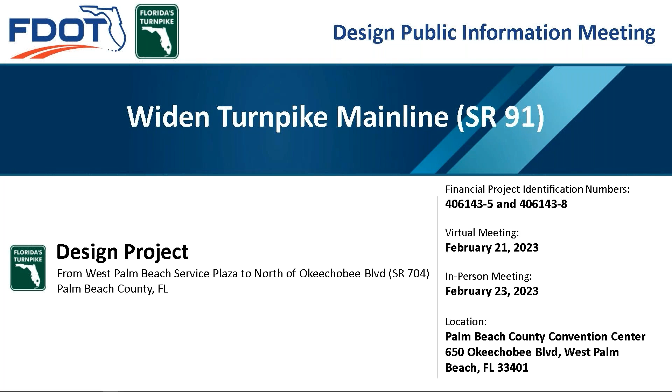This project is being developed in accordance with the Civil Rights Act of 1964. Under Title VI of the Civil Rights Act, public participation is solicited without regard to race, color, national origin, age, sex, religion, disability, or family status.

If you have any questions or concerns, please contact Susan Siddiqui at 407-264-3640 or Stefan Kulikowski at 850-414-4742. The projects are located in Palm Beach County, Florida, along Florida's Turnpike Mainline or State Road 91.

The original project has been broken up into two separate projects with different construction time periods. The first, or Southern project, begins at West Palm Beach Service Plaza and continues to north of Belvedere Road. The second, or Northern project, begins north of Belvedere Road and continues to just north of Okeechobee Boulevard, or State Road 704.

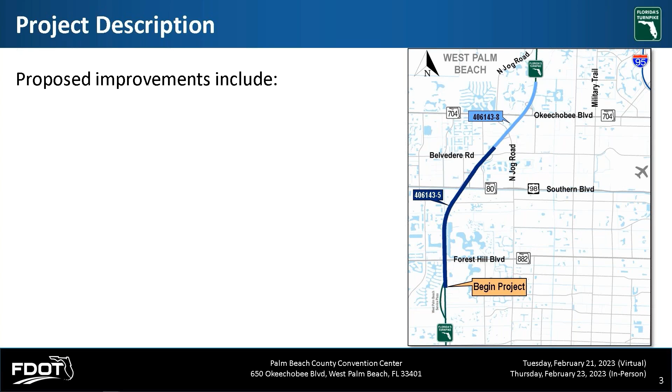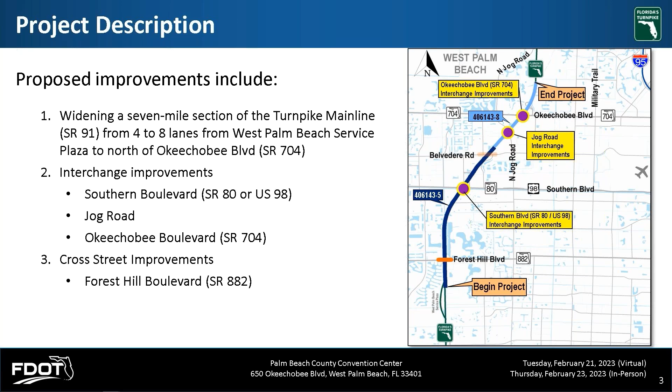Both projects will consist of widening the main line from 4 lanes to 8, and there will be improvements to 3 existing interchanges along the project corridor, including Southern Boulevard, Jog Road, and Okeechobee Boulevard. Additionally, there will be improvements to 2 cross streets, Forest Hill Boulevard, or State Road 882, and Belvedere Road.

This project is following the design project development process. This process includes 5 phases beginning with planning, project development and environment, or a PD&E study, final design, right-of-way acquisition, and finally construction. The planning phase has been completed, as well as the PD&E study.

Our project team is currently working to complete the 3rd phase, final design. During this phase, our project team will be working to implement the original project development and environment study and obtain the necessary environmental permits. The design phase is typically followed by right-of-way acquisition. However, this project requires no additional right-of-way. Construction is anticipated to begin in the 2nd quarter of 2024 for the Southern project from West Palm Beach Service Plaza to Southern Boulevard.

Construction on the Northern project from Southern Boulevard to Okeechobee Boulevard is expected to begin in the 1st quarter of 2025. The proposed design is focused on enhancing safety and operations and accommodating future traffic growth due to increasing population and freight. Today we will present the following: existing mainline configurations, proposed improvements, noise wall policy, and project schedule.

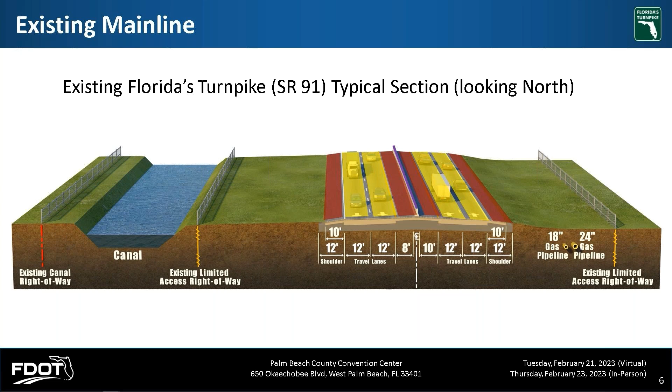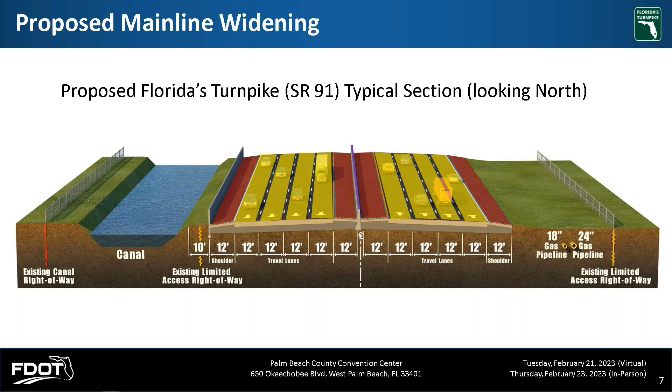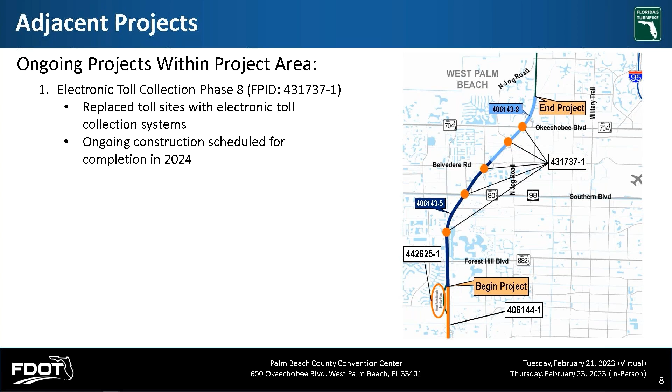The second is the Turnpike Mainline, or State Road 91, widening from Boynton Beach Boulevard to Lake Worth Road, FPID 406144-1. This project is located just south of our project limits, with ongoing construction scheduled for completion in 2025.

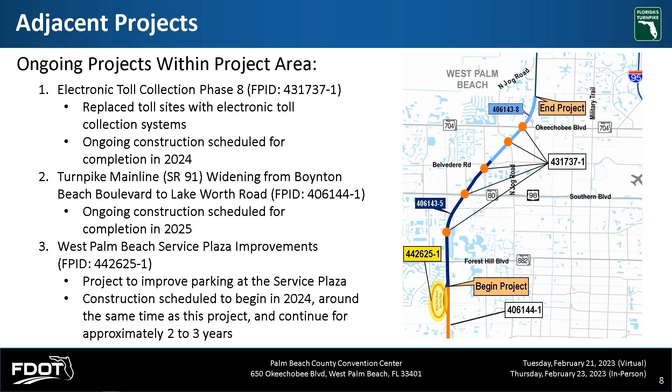The final project is the West Palm Beach Service Plaza Improvements Project, FPID 442625-1. This project will improve parking at the Service Plaza. Construction is scheduled to begin in 2024 and continue for approximately 2 to 3 years.

Starting from the south and working north, the first widening project begins here with the 8-lane widening of the northbound and southbound travel lanes starting just north of the West Palm Beach Service Plaza. The widening will continue north under Forest Hill Boulevard, State Road 882.

The Forest Hill Boulevard Bridge over the Turnpike will be replaced, keeping the current 6 travel lanes with an additional 12-foot shared use path on both sides. The existing mainline toll site will remain in operation while being widened to accommodate the new lanes.

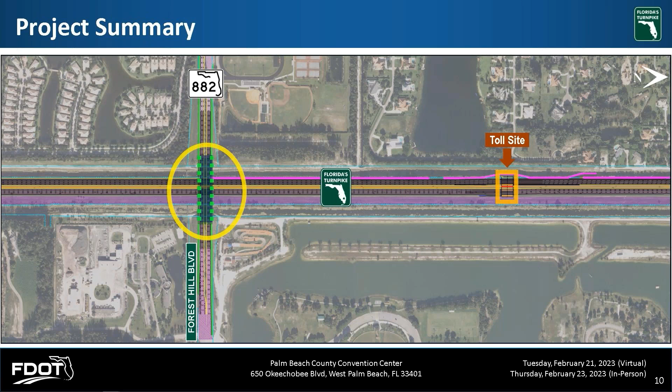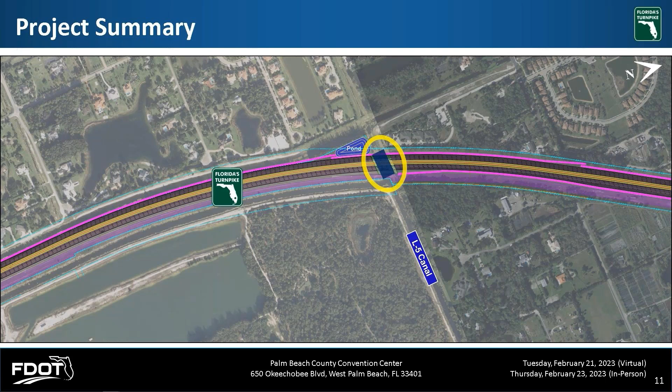Moving north along the mainline, the widening will continue with the bridge over the Lake Worth Drainage District L5 canal being widened. The Southern Boulevard, State Road 80, US 98 interchange ramps will be reconstructed to accommodate the widened Turnpike. A similar interchange layout will be maintained.

A second exit lane will be added to both interchange exit ramps. The Turnpike Bridge over Southern Boulevard will be widened with improvements being done on Southern Boulevard itself.

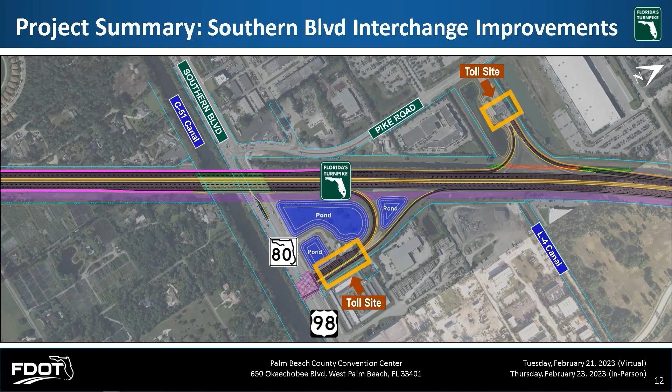The existing ramp toll sites at Southern Boulevard and Pike Road are being removed by the current electronic toll collection project, FPID 431737-1. Along Southern Boulevard at the East Ramp intersection, the double right turn onto Southern Boulevard will be maintained.

The left turn lane onto eastbound Southern Boulevard will be extended and a third left turn lane will be added.

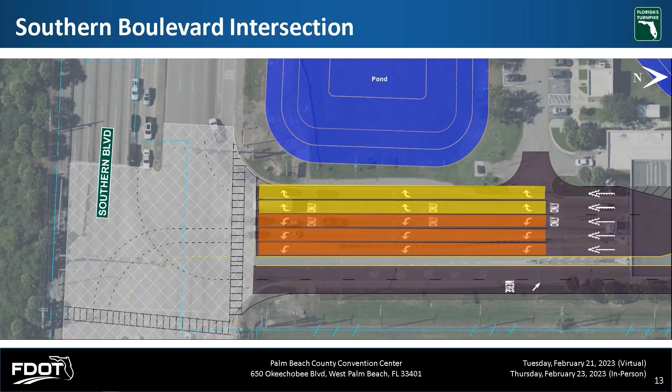The transition from the southern project to the northern project occurs just north of Belvedere Road. The mainline toll site will be widened and stay in operation throughout construction.

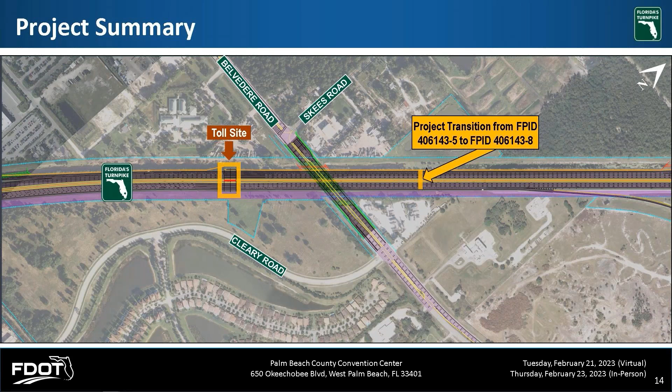Belvedere Road will be reconstructed as it is today with 6 travel lanes between Skees Road and Cleary Road, with the addition of 7-foot bike lanes and an 8-foot sidewalk in each direction.

Moving north along the turnpike is the Jog Road interchange. The interchange currently only serves movements to and from the south. This project will complete the movements to make this a full interchange.

A new off-ramp from southbound Turnpike to Jog Road will be constructed, as well as a new on-ramp from Jog Road to northbound Turnpike. The 2 new ramps will be tolled.

Improvements to the ramp intersection with Jog Road will be made. Jog Road and the Jog Road Bridge over Florida's Turnpike will be reconstructed to accommodate the mainline widening underneath.

The reconstructed Jog Road will have 6 lanes as it does today, along with new 7-foot bike lanes and an 8-foot sidewalk in each direction.

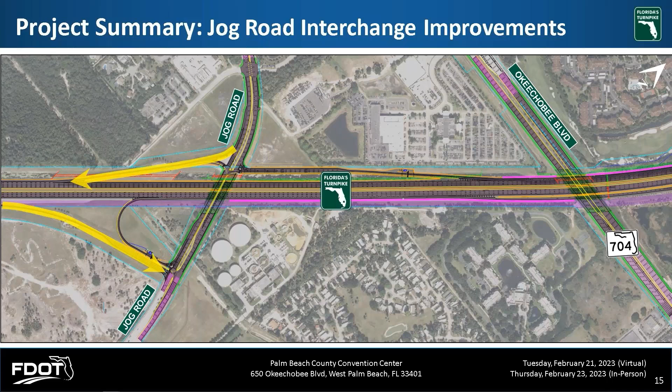The existing ramps, the northbound off and southbound on ramps, will be reconstructed to allow for the new ramps and widening of the turnpike. At the existing southeast ramp, additional right and left turn lanes will be added.

This project will also build new left and right turn lanes from Jog Road to a new on-ramp to the northbound turnpike at this intersection.

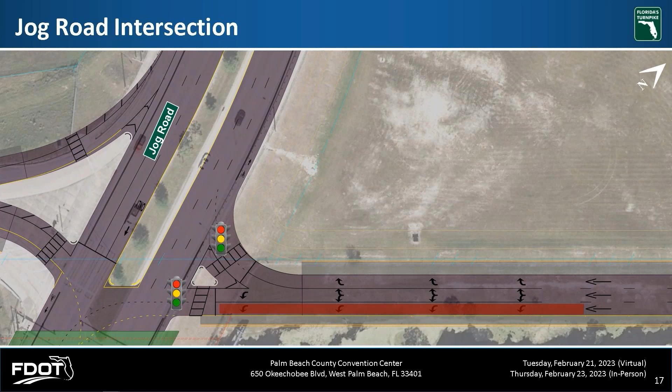The new southbound off-ramp will connect at the northwest intersection. Here, a new southbound approach will be built with 3 turn lanes: a left turn lane, a shared left and right turn lane, and a right turn lane.

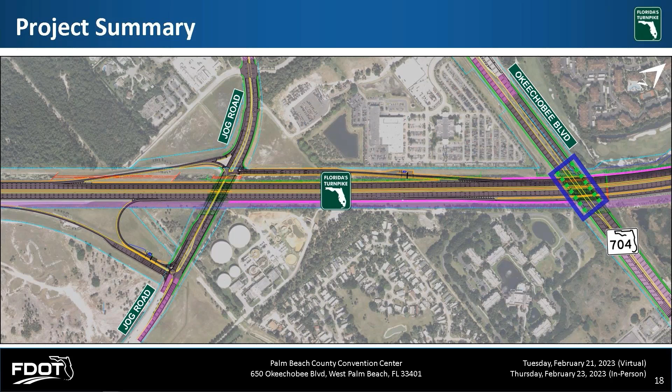Okeechobee Boulevard, SR 704 over the turnpike, will be replaced in kind with 8 lanes. The existing pedestrian bridges will be removed and replaced with a wider 12-foot shared use path added on both sides of the new bridge. The Okeechobee Boulevard interchange ramps will be modified to accommodate the turnpike widening.

To enhance safety, the northbound off-ramp will be split after exiting the turnpike into right and left ramps approaching the intersection. Each ramp will serve westbound and eastbound Okeechobee Boulevard separately, eliminating the current weaving movements approaching this intersection.

As with the Southern Boulevard toll sites, the existing ramp toll site is being removed to be replaced by electronic toll collection by the current adjacent project, FPID 431737-1. This project will finalize the construction in these areas.

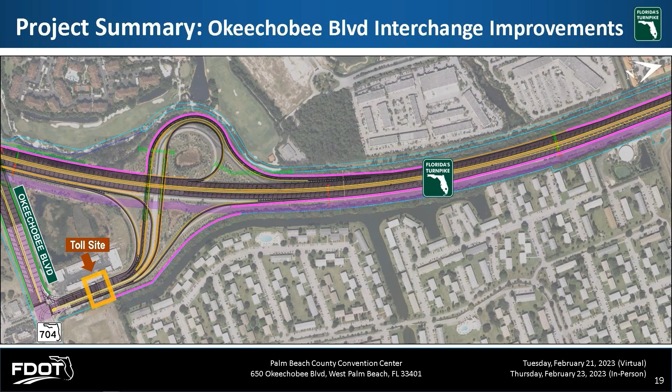At the southbound approach of the ramp intersection, a second right turn lane that also serves through traffic and a third left turn lane will be built approaching the southbound ramp intersection. There will also be a traffic signal for vehicles turning right.

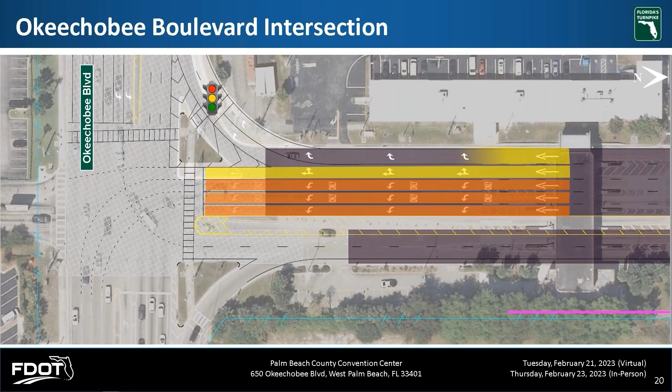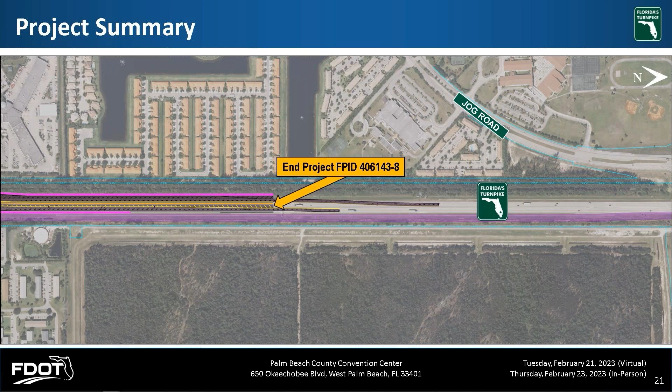The project ends just north of the Okeechobee Boulevard interchange and will have a transition from the proposed 8-lane widening to the existing 4 lanes.

In addition to widening and interchange improvements, noise walls will be installed in some areas within the project limits. All noise assessments are carried out in accordance with FDOT policy, which is based on federal and state regulations. For walls to be included in the design plans, they must meet FDOT acoustical criteria and must be constructible.

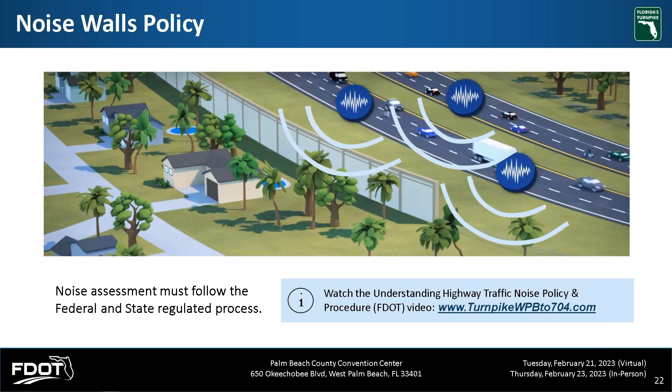The proposed noise wall locations from the draft noise study are available to view on the boards located within the meeting room, as well as the project website. For more information regarding the noise wall evaluation process and approach, please visit the project website to view the Turnpike's traffic noise video.

When the project reaches the construction phase, signage will be placed to inform drivers of detours before work begins. The project team will continue coordinating with local agencies, businesses, and the public during project construction through the project website, email, and newsletters. Safety is a top priority during construction.

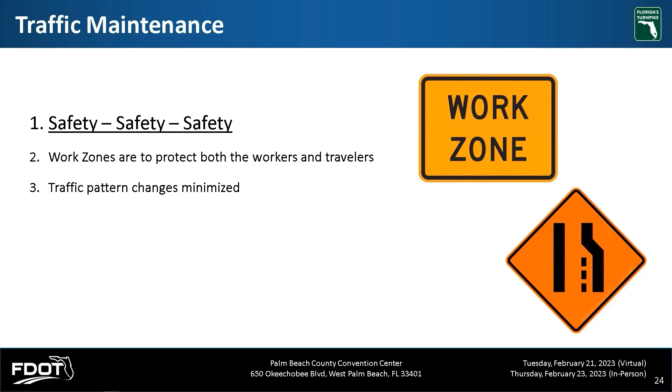The construction along Florida's Turnpike Mainline will be implemented in phases. The work zones within these phases are set up to protect the workers and the traveling public while minimizing changes to traffic patterns. Travel lanes will remain open during peak periods with nightly lane closures occurring Monday through Thursday. Nighttime detours will also be utilized.

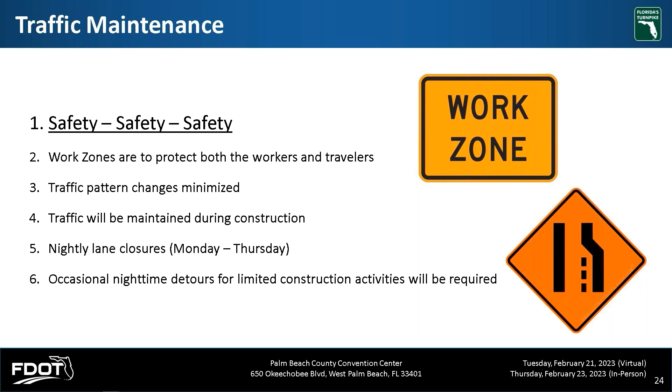The current project schedule includes this design public information meeting. Construction from the West Palm Beach Service Plaza to Southern Boulevard is expected to begin the second quarter of 2024. Construction from Southern Boulevard to Okeechobee Boulevard is expected to begin in the first quarter of 2025.

Your comments are essential to this process and will help Florida's Turnpike Enterprise understand your concerns and suggestions for improvement. We encourage you to provide a written comment tonight or submit your comments directly through the project website at www.turnpikewpbto704.com. If you prefer, you may mail your comments or submit by email to the project manager, Carlos Estrella, or Community Outreach Specialist, Thomas Alexander. We would appreciate your written comments by March 6, 2023.

To view the documents presented at tonight's meeting or find more information on this project, please visit the project website at www.turnpikewpbto704.com. Thank you for your interest in the Design Public Information Meeting for the Florida's Turnpike Mainline State Road 91 widening project from the West Palm Beach Service Plaza to north of Okeechobee Boulevard in Palm Beach County. And thank you for taking time to participate in this meeting.

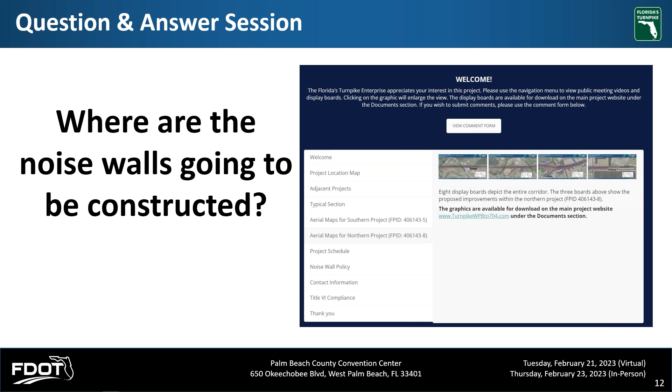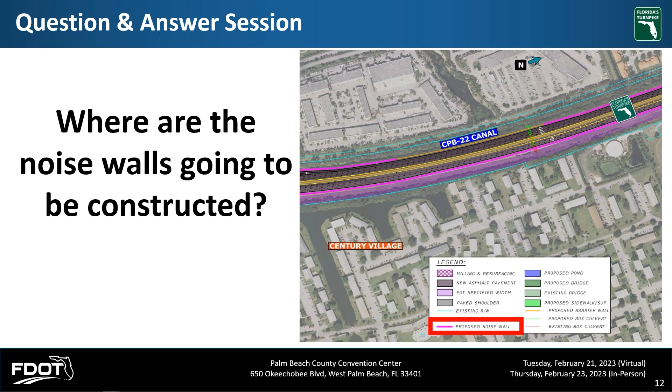Where are the noise walls going to be constructed? The proposed noise walls are shown on the aerial maps in the virtual meeting room. If you click on one of the exhibit tiles, the exhibit will open and allow you to zoom in and out. The noise walls are shown as bold magenta lines on the aerial maps. These same aerial maps will be available to view during the in-person public meeting this Thursday.

Next question: why did my neighborhood not qualify for a noise wall? To qualify for a noise wall, homes must have received a building permit prior to February 15, 2008, which is when the Project Development and Environment Study was approved. This date is also known as the project's date of public knowledge.

Homes meeting that deadline were analyzed to determine if future noise levels will exceed a certain decibel level, and if so, noise walls were studied. To qualify under FDOT policy, noise walls must reduce noise according to certain acoustic criteria. For more information regarding the noise wall evaluation process and approach, please visit the website shown on the slide for the Turnpike's traffic noise video.

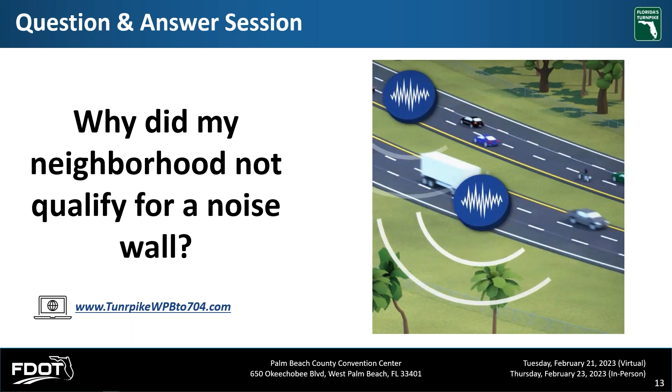Will the West Palm Beach Service Plaza remain open during construction? Yes, the West Palm Beach Service Plaza will remain open during construction. Some of the areas will be under construction, but there will be adequate temporary signage for guidance.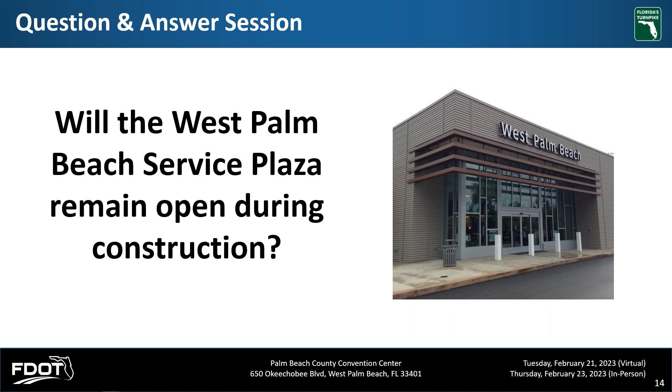When will construction begin, and what is the overall timeline for construction? The project bid opening is anticipated for the first quarter of 2024, with construction from the West Palm Beach Service Plaza to Southern Boulevard anticipated to start in the second quarter of 2024. Construction from Southern Boulevard to Okeechobee Boulevard is expected to begin in the first quarter of 2025.

The construction duration has not been estimated at this time, but a project of this size generally takes 5 to 6 years to complete.

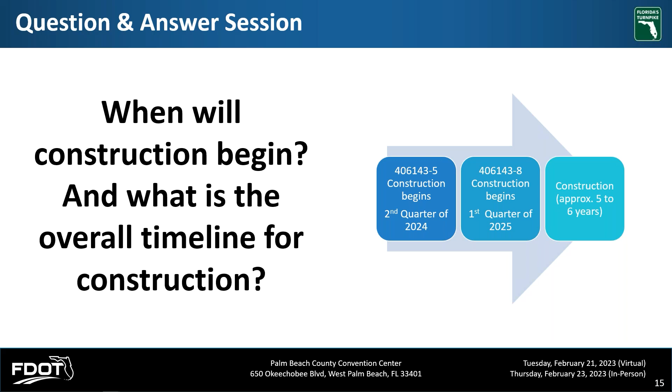What is the Turnpike doing with regards to safety and the potential of wrong-way drivers going up ramps? This project will upgrade the existing wrong-way vehicle detection systems. The wrong-way vehicle detection systems on roadways owned and operated by the Florida's Turnpike Enterprise is an integral part of a statewide effort to enhance driver safety.

The system includes four rectangular signs which activate and flash when a vehicle travels the wrong direction on the ramp, and sensors, cameras, and technology that alert law enforcement and the Turnpike's Traffic Management Center. Employees at the Traffic Management Center coordinate with law enforcement to intercept the wrong-way driver. Warning messages are also displayed on roadway dynamic message signs to alert others of a possible wrong-way driver.

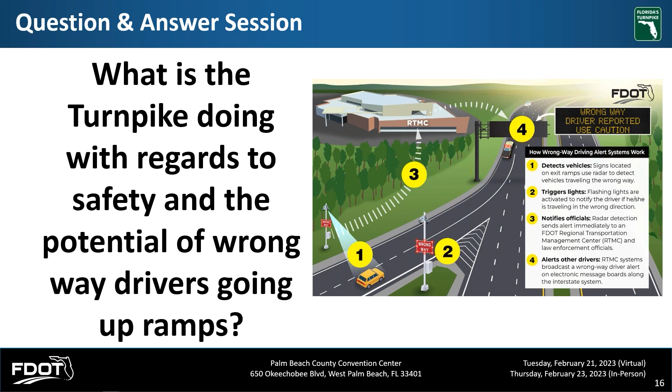When the wrong-way driver detection system activates, wrong-way drivers usually self-correct and turn around before entering the high-speed lanes. Again, this project will upgrade the existing wrong-way vehicle detection systems.

Any other questions, John? No, that was the last one.